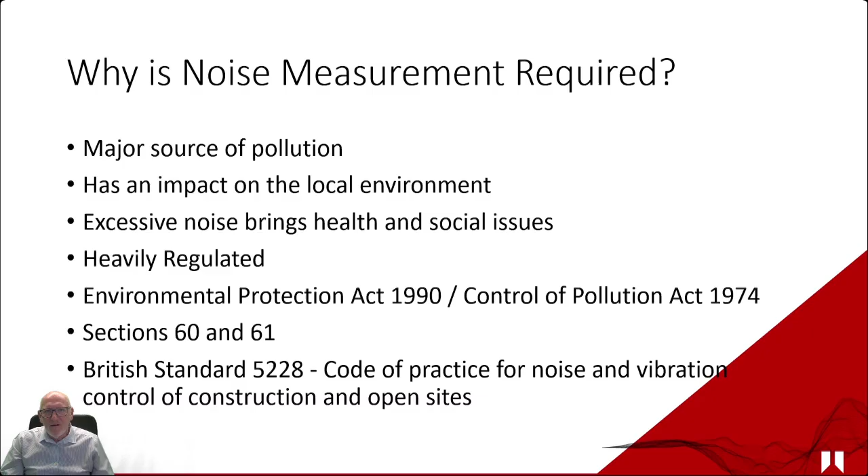So there are a lot of other things associated with this. As I say, I'm not looking to go through them all today. But one of the other things that you tend to get is where things are either council driven, license to operate driven, or Environment Agency driven. So many councils do have their own construction code, particularly in London, that would help anybody that's due to make noise in their construction or demolition project. And a lot of these would typically define, as I've mentioned earlier, the specific hours of working, and will tend to prescribe regular monitoring of this.

Typical on-site and off-site levels would be an LEQ, which is an average noise level, basically of every 5 minutes, an average not exceeding 70 decibels on-site, and maybe 75 decibels on an hourly average off-site. And there are many variations of this. That's just some typical levels that people use.

But of course, with the license to operate side of things, that's where the council will give permission, or it could be in the planning permission for a particular industrial site or entertainment site or whatever, and it could be part of the conditions that that particular site or location cannot make more than a certain amount of noise, whatever that happens to be, at particular periods of the day or days of the week,

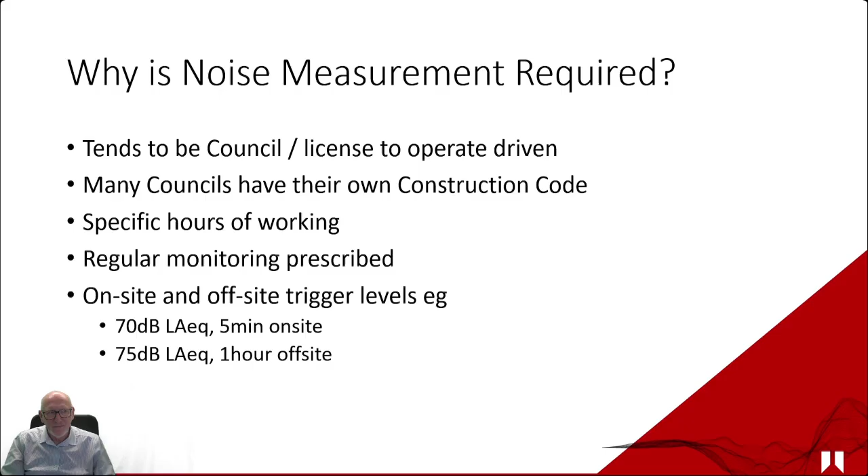So where you've got monitors that are, for example, in a housing estate or on a lamppost or in a local substation area or something like that, you've got much less control over that. So that's why we're doing it.

Now let's have a little look at what typically can cause noise just quickly. Obviously you've got lots of heavy machinery and particularly things on site. If you've got general noise from an industrial site or industrial complex, you've got things like fans, various machinery that comes on and off. There are potentially lots of things that can cause high noise levels that might potentially be disruptive to the local population.

But you've also got a lot of traffic potentially associated with static industrial sites, so even supermarkets and things like this. So it could be limited by the times of day that traffic's allowed. You could have to put a traffic management plan in place, which takes into account not only the impact on the local roads, but also the times of day that those noise levels are going to be higher because of that increased traffic. And you've also got the workers themselves, mobile phones, radios, etc.

Forklift trucks actually used to be a big one, and I think they still are in certain locations. They tend to use a different sort of sound these days to mitigate that a bit. So it's not the high-pitched sort of beeping sound, it's more of a white noise sort of sound. So there are improvements as time goes on. But any sort of movement of machinery or of vehicles on site could potentially cause an issue.

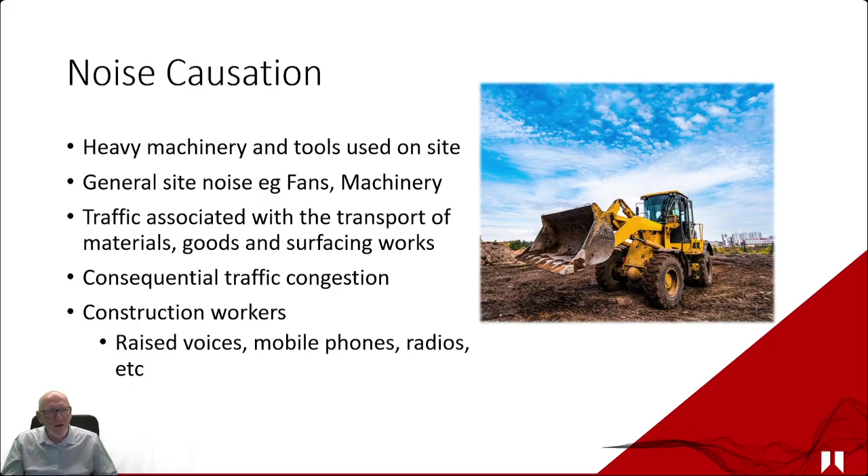So one of the things that you have to do once all of this is in place is that you've got an agreement. So yes, you can operate your project or you can operate your site, but you must keep to some agreed limits. And there are various mitigation measures that companies can use to actually help with that. Because of course, at the end of the day, the boundary noise monitoring is really a last resort. That's not going to cause the noise levels to be any quieter.

It will let you know what those noise levels are. You can use that data to put in an improvement program or to look at individual complaints and work out what is causing an issue and fix it much quicker. So there's lots of advantages to it. But obviously, like with anything, with a hierarchy of control sort of concept, really you're looking at trying to reduce the noise that's being generated at its source.

So lots of mitigation measures that you can use. Obviously, your different methods of working. What equipment are you using? Can you use things that are quieter than others? Fabricating a lot of equipment off-site and bringing it on-site, so you're minimizing the amount of sort of metal bashing and things that you're having to do on-site.

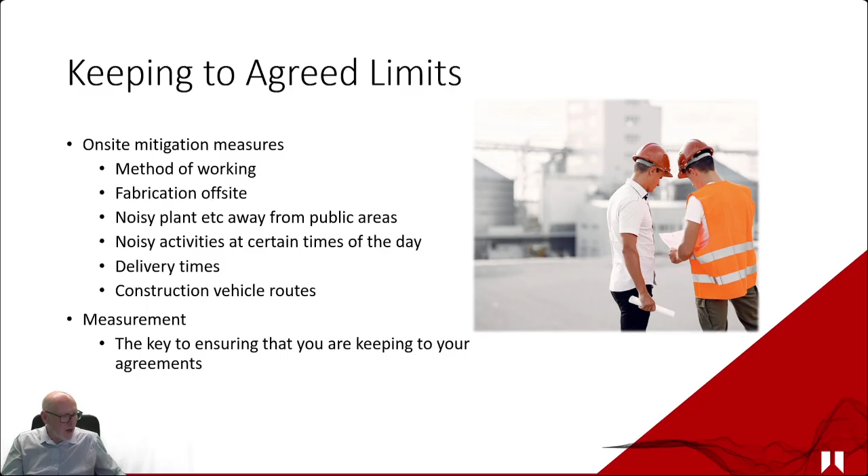So some typical noise levels for construction sites here, just to give you an idea of what those noise levels are. Now, some of them are fairly quiet, normal conversations about 60 decibels, but when you start getting grinders and cutters and pile drivers and hammers and things like this is where you start to get way above the 80 decibels, 90, 100 decibels. So some of these things are pretty loud. Now, it's only that many decibels in that locality.

But once noise levels start to rise, as we know about decibels, they're logarithmic in nature. So 90 decibels is 10 times louder than 80. 100 decibels is 100 times louder than 80. If you get up to 110 decibels, that's 1,000 times louder than 80 decibels. So this is the way noise goes.

And a lot of it depends, and you can't just say, well, if it's 100 decibels here, then it's going to be 50 decibels a mile away or something like that. It doesn't always work like that. It depends on the ground that's in between what they call the source and the receiver. And it depends on the topography, any buildings in the way, a whole lot of other things. But just to give you an idea of the types of equipment that can be very noisy.

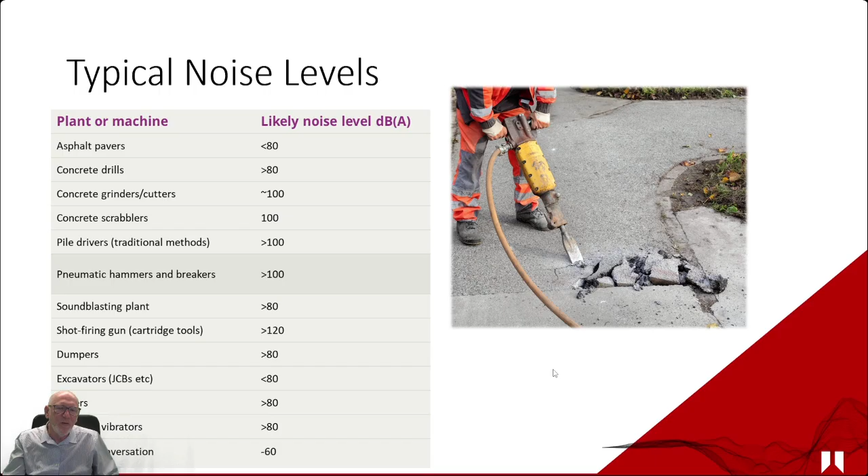I've just had a comment from Simon. Thank you very much, Simon. He says, Craig, we find boundary noise falls into our social value TOMS framework. It's also driven by customer demands. So yeah, I think he's basically saying that it's something that, as a company, they take very seriously, which is good to hear.

So what is boundary noise measurement then? Let's get into a little bit of the detail. As I said, it's a method of capturing what those noise levels are when you're exiting the site. And it's a way of measuring the impact of your company, whether it's an industrial site or an entertainment site or a construction site, on the local community. We typically put it on the closest point to the receptors we can get on the boundary. It's not always possible because of fencing and power, etc. But there'll always be a way to get it somewhere close.

If you've got a large site and you've got a housing estate on the north side, there's no point putting your only boundary noise measurement device on the southern end of the site, even though that might be the loudest part, where all the impact is to the north, where that housing estate is. So it's got to be in line at the closest point to those receptors.

You've got an option with these systems basically to do timed or continuous recording. So even though we're talking about boundary noise measurement, what I'm going to be suggesting is a continuous measurement, which means permanent, fixed or semi-permanent systems. That's not always necessary. The timed aspect of this is where you might actually monitor this with just a handheld sound level meter of some description. So you'll go out there and take measurements on a regular basis.

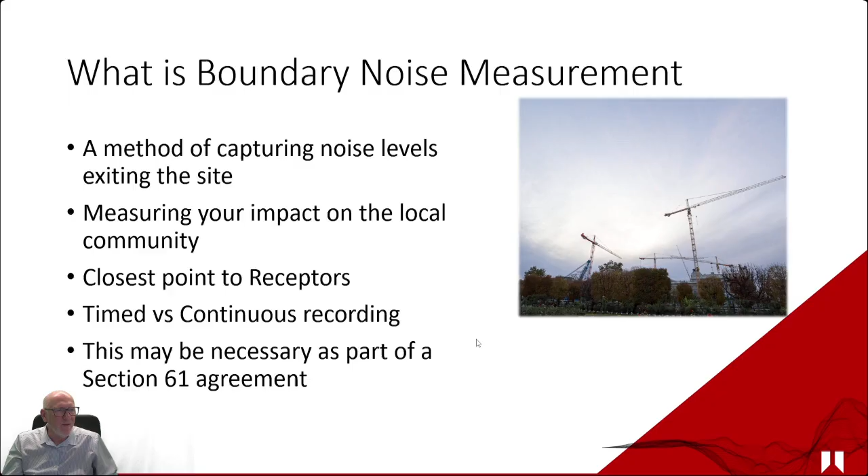So this is what we're trying to do. We're trying to measure the noise level at the outer part of the site to see what's affecting your neighbourhood. So what sort of equipment's available? And this is this next section. What equipment's available? What should we be capturing? And then, of course, what do you want to do with the data?

Because with noise measurement systems, modern ones, you have such a huge amount of potential data that you can collect. But of course, it's important just to understand what part of that data is important, and what other tools are available to actually supplement the noise data to give you a better idea of what's going on. So let's have a little look.

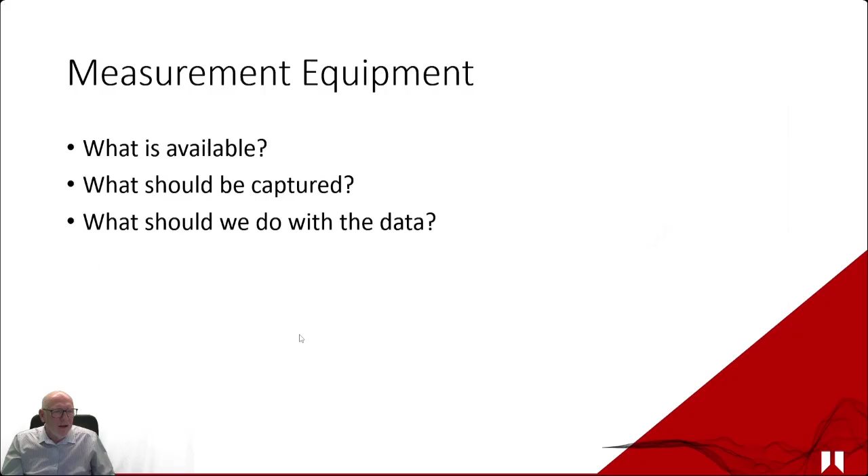So typically, just as a first thought, when we're looking at measurement equipment, it needs to meet, generally speaking, a certain standard. So you could go out with your phone. You can get a decibel meter app on your phone and do that. And if you're comparing maybe one day with the next on a phone, that will maybe give you some idea. But if you're looking at what the absolute noise level is to a specific level of accuracy, just using your phone will not cut it.

Because the instrumentation needs to meet a very specific standard. So whether that standard comes from the BS 5228 construction noise standard, or BS 4142 or whatever, there's a whole different set of standards. Typically, they look for instrumentation to meet a very specific standard. Typically it needs to be a Type 1 or Class 1 instrument, so it's a higher level of accuracy. And it needs to meet the 61672 standard for the sound level meter or the noise monitor itself. And that defines how it's actually working to capture that noise level.

So you can guarantee if somebody comes to you and says, well, you were too noisy last week, and you say, no, we weren't, I've got the data here. It shows us that the noise leaving the site on the boundary noise monitor was below this level. And they'll say, well, what are you using? And you need to be able to show that the equipment meets various standards and has a certain level of accuracy. So it's important that the equipment that you've got reflects that. So what I'm saying is, just using a mobile phone app, whilst indicative of high noise or low noise, is not accurate enough to do this job.

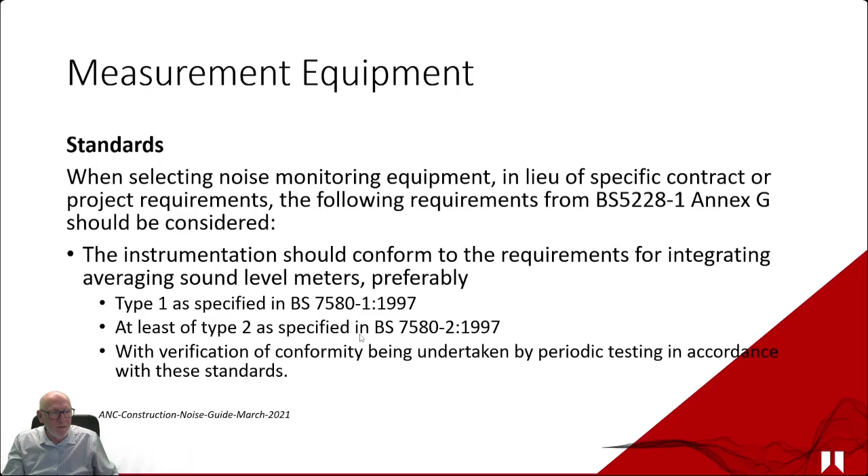And you either put that on a tripod or just hold it in your hand and take a measurement in a location for a specific period of time. It could be typically 15 minutes every hour, or 15 minutes every 2 hours, or 30 minutes every, whatever it happens to be. But that's attended measurements. Now, the advantage of attended measurements, of course, is that you can see what's going on if the site is small enough to enable you to do so. So you can maybe tie certain noise levels that you see on the machine with the activity that's on the site. So that's an advantage of it.

But of course, you're not there all the time. You're only there typically for relatively short periods of time to get some samples, because it's expensive. You know, you're basically employing somebody to do that job.

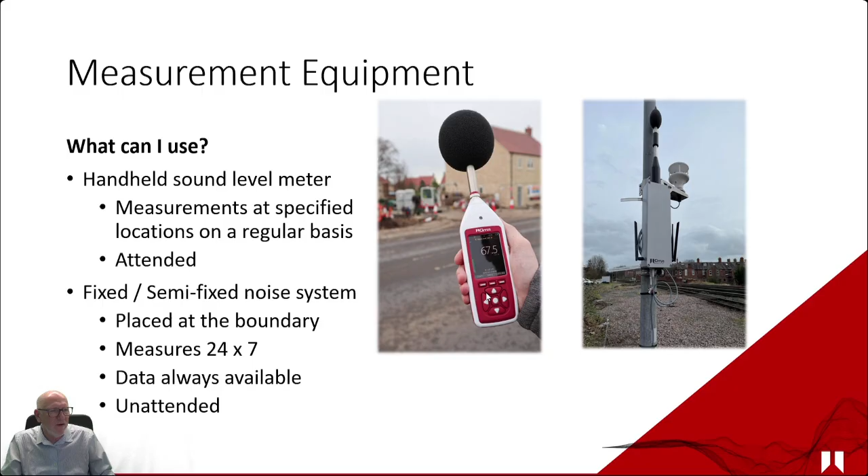So it's logging it at the level that humans actually hear it, not what's really there, because you probably know this, but humans are not the best at understanding noise levels, particularly if there's a lot of low frequency noise there. We just don't hear it very well. So it's a standardized way of giving you a number or a set of numbers that relate to the way we actually hear the sound.

So this LAeq is an average noise level over a period of time. That's typically one of the things that we look at. So it could be daily, it could be an hourly average, it could be a work time average, it could be just a 5-minute average or something like that. It all depends on the circumstances. Because this is such a general talk, we're talking everything, as I mentioned, from racetracks, entertainment venues, to petrochemical plants, mining, construction sites, etc. So it all depends on what's actually required.

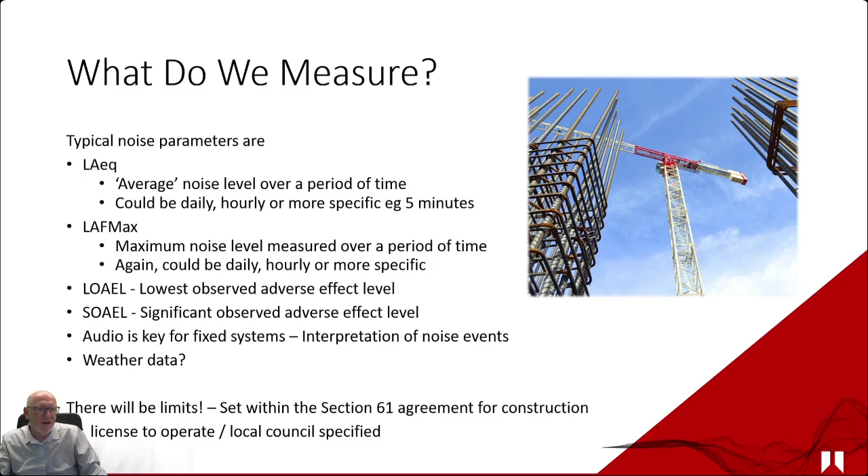Okay, so equipment and placement is the next bit. I've mentioned the boundary, and the boundary can be a number of different things. It could be a solid wall, it could be a fence, it could be an open area of land. But whatever we do and wherever we put it, the correct equipment is key to this. So I'm assuming here that we're not just going for the handheld sound level meter, we're going for more of a fixed or permanent noise monitor.

But any equipment you do have, you just need to make sure it's reliable, it's flexible enough for your needs, and it has all the data. Now, most of these sort of environmental noise monitoring systems will definitely have all the data, but it's something you will need to check when you start to look at it.

Whatever system you put in, a fixed system, it's got to be free field. So that microphone is key. That's what's picking up the noise. You don't want it under trees. You don't want it in a corner. You want to make sure that it is open, so that any noise leaving that area past that fence, it's going to pick it up.

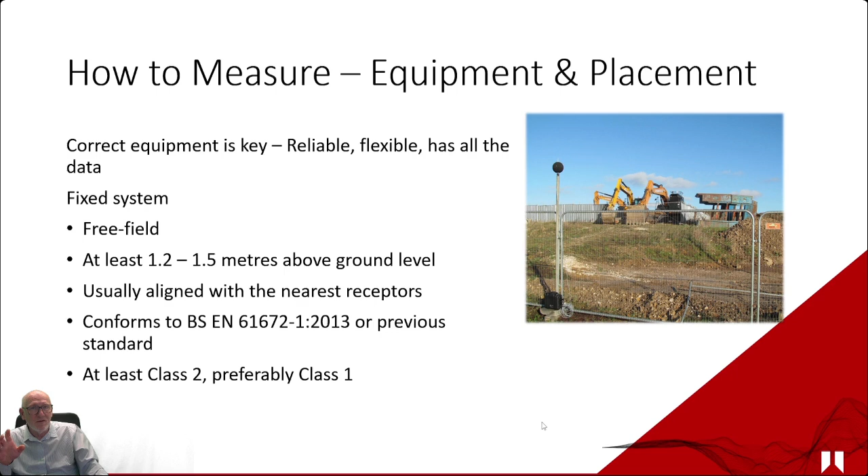But placement is key, because you also want to be able to gain access to it at certain times as well. So you need to make sure that it can be accessed. But any system like that that's going to be more permanent, then you've got to think of a few different things. So, think about power, it needs some form of power. Can you get power to it? Mains power, does it need to be solar power? Can it operate on batteries for a long period of time? If you've got batteries, that's great. It might last a few weeks, but you might have to keep sending people out to recharge the batteries.

Generally, these fixed systems, you want to communicate with them. That's something else to consider. So yes, you could leave it there and you could wander up to it every week and download the data. That's one way of doing it. But ideally, what you really want to do is to have it permanently operating and permanently sending that data to you. So it's available 24/7. So communications is something that you need to look at with any of these systems.

That's the ideal. It's not absolutely vital. As long as it's measuring, that's great. But you need to get information from that, particularly if you've put in some triggers. So if you put some triggers in that you want to be warned of when high noise levels exist, it needs communication to do that. With temporary sites, as you saw in that earlier picture where you've got some sort of temporary fencing, people will steal these things.

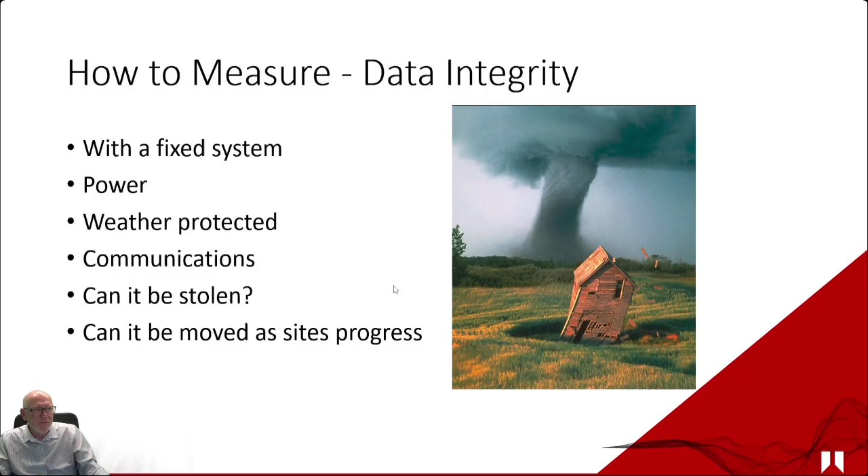Some of the other things that we need to consider then, I've mentioned alarms just now. So alarms is where you may want to be warned, or a particular set of people might need to be alerted when certain noise conditions occur. So you've got your monitor on the boundary fence, you know what the limits are, but you also want to be proactive with a system like this.

So what you want to be able to do is to say things like, if the noise level gets above a certain point for a certain length of time, then send a text or an email or a notification to a particular person or group of people to make them aware. There are various screens on these systems where you can see things pop up, but having that sort of alert message can be quite useful.

So that's about alarming. You may just want the system to note every time when a certain condition has occurred. You might not want to physically warn somebody, but you might want the system to mark up, if you like, when certain conditions occur, so that you can go back to it and analyze the data a bit further.

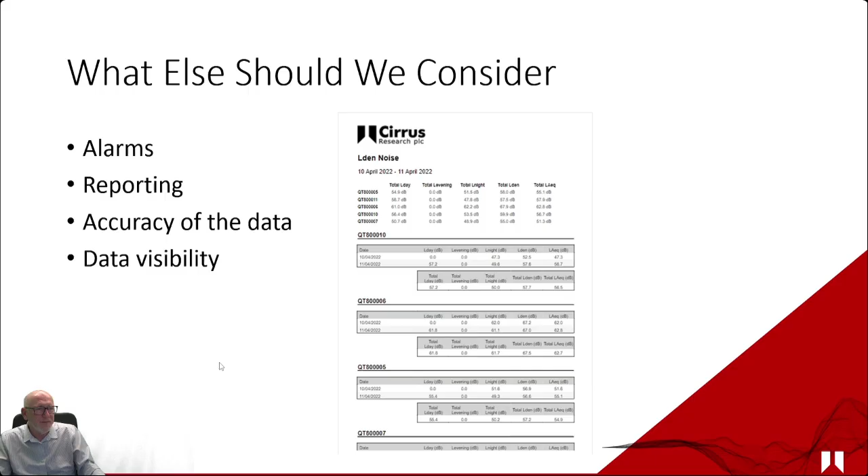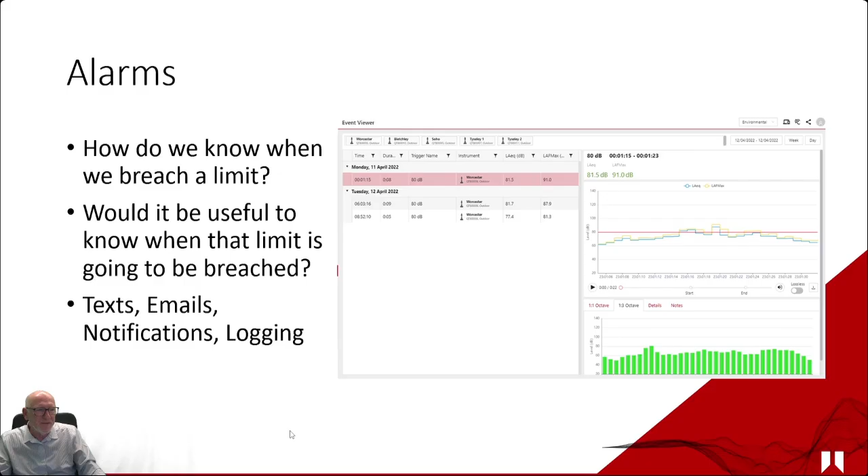Systems need to be able to report. The reporting is important, but the reporting does vary quite considerably. You will have a vast amount of data on your system. So having something where you can just pull out the information that's required is important. You may have to do a little bit of manual work on it. But remember, typically these systems are logging those noise levels every single second.

You can look at it that way, but really you want some sort of summary of that information, which makes it a lot easier to go back further in time to see why it is so much noisier this week than it was last week, that type of thing.

So reports: you might want weekly reports, you might want monthly reports, and what you are reporting on may relate directly to what those licensing conditions are, but you might just want to list what the average noise level was, what the maximum noise level was, maybe on an hourly basis, and any list of breaches as well. So you want systems where you can pull that information out quite easily. So it could be that summarized data is all that's required.

It may be nobody wants to see that information at all, unless somebody starts to complain a lot, or people will want to dive into that in a lot more detail. So it's important to establish what those reporting requirements are at an early stage, particularly on a project, but also if you're selecting such a system for your existing industrial site, understanding what information you do need to report on could go a long way sometimes to defining what system you eventually install. So reporting is important.

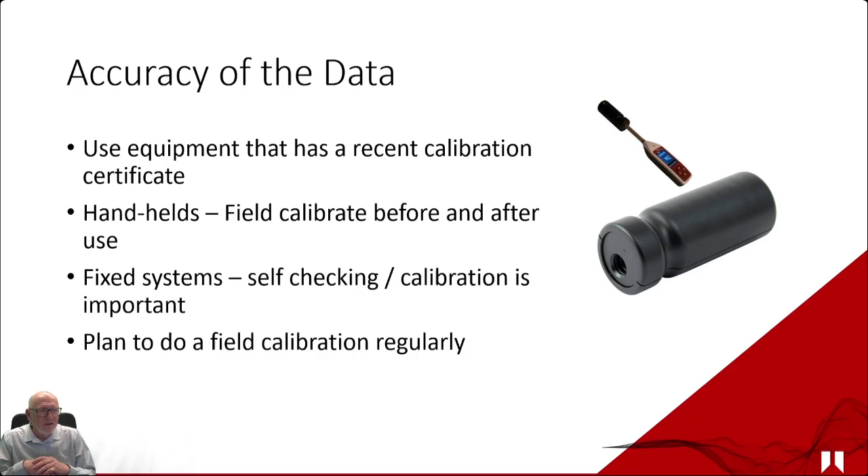Data visibility is the next one I want to briefly talk about, and this is where you want to make that information visible not just to multiple members of your team on site, but also maybe to people off site. So some projects make that data available to the council or even to the general public. They may have their own website to do that. So it could be that any noise measurement system you put in, if it's more of a fixed system, you might want to pull that data out automatically into your own website and make that data visible.

Or with the system we have, the Quantum system, you can actually make specific pages visible to the wider general public. If you need to, you could create a secure URL link where they can just see that page, if you want to make that page just have the information on there that they need. So that's a way of building trust. I know some of our customers do that with their own website, and they put that information up there, make it available. And it may just be to the general public, or it could be to the environmental health department in a local council. It all depends. It's not always done, but if you need to, then that's something to think about when you're defining what system you're going to go for.

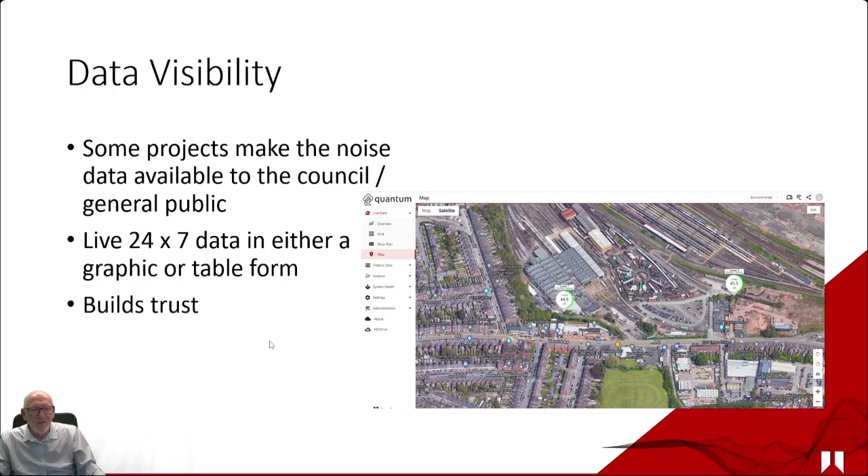And then some further considerations. So, if you've got long-term sites, that might define the type of boundary system that you put in place. If it's only a short-term project, then maybe handhelds would do. Keep checking on the system verification or the calibration side, and that's just something you need to bear in mind, because most of these systems will need this verification or full calibration, for want of a better term, on an annual basis. So you may either send the equipment away or maybe get somebody out to do it on site. Sometimes you're managing multiple sites, so you've got lots of systems everywhere. Does that define what sort of system you put in place?

These systems do need managing, because if you're deciding to make the leap and go to the expense of putting in a monitoring system, just make sure that somebody has got some responsibility for it and is managing it. Whether that's the manufacturer helping out, or whether you've got specific people on site to make sure that that system is up and running and you don't have any issues with it.

They're typically very reliable, but you will get things occur. It's always better to understand when things are going wrong than just wait 3 weeks and say, oh, we've missed all that data. What have we got to do now? So whether that's internally, whether you use an external consultant to do that for you, etc.

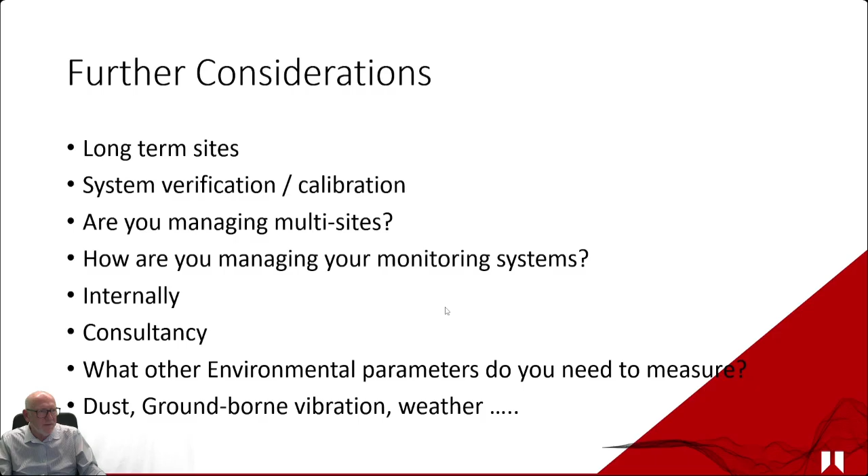Okay, so I've talked for about an hour. I'll leave it at that. I hope I've covered everything that people were expecting.